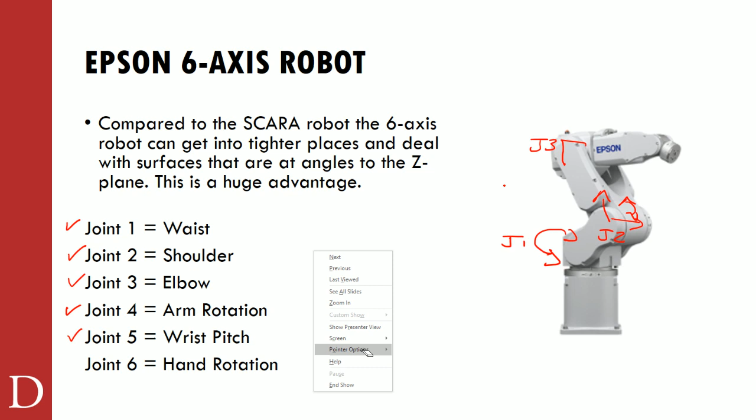So when you get to J4, J5, J6, they're all very close to that end of arm tool, right? They're all right out by the edge of the end of arm tool. What J6 does is it actually allows this thing to rotate around like this, versus this being my axis of movement for the wrist pitch, and then this is actually that faceplate's ability to rotate around and put into different positions.

So what you can see is we can definitely get into some strange, precarious places and do some cool stuff, whether it's to weld something, assemble something, handle some material, whatever that might be.

All right, before we get too detailed, I did want to go over, and this is applicable to all of robotics in general, but it comes up when we start talking about 6-axis: how does a robot know where it's at? That's really important, right? If I need to go to this location and pick up a part, then I need to know where I'm starting and how I'm going to go about getting there.

Well, each one of those axes that we were talking about is run by what we call a servo motor. So in here there's a motor, I'll call it M. And then there's a motor shaft that goes through there that actually turns this. But on the other end of that motor shaft, there's something called an encoder. So each one of those axes has a motor, an encoder, and a shaft that's actually hooked up to the gears to do the mechanical work.

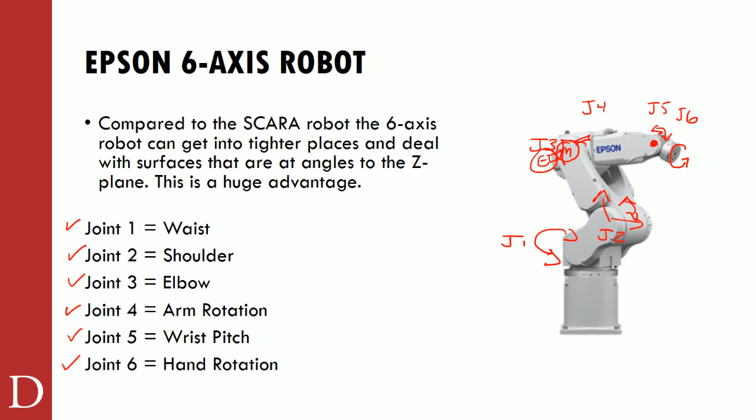Well, the beauty of that encoder is the encoder that's hooked up to that shaft has what we call an encoder disc on it. And so this is the cool part. It's essentially like having a measuring tape. Imagine I want to walk 20 feet. If I have a 20-foot measuring tape, I can do that very, very accurately, right? Versus if I just say I'm going to walk 20 feet and kind of guess where 20 feet is, right?

So that's how this does it. It basically has a measuring tape. So imagine this is the motor shaft, and down here maybe is the motor, and maybe this is connected on the other side to the actual movement that we're going to move. But as that shaft turns, it's also turning this optical disc, this rotary disc.

And it can be made of a lot of different things. It's usually going to be made of a glass, and it has shiny and opaque surfaces. The one that we're seeing right here is a little bit different setup. It's a little bit simpler. Basically, this is a metal disc, and it's got holes in this metal disc. And what we do is we have an LED right here, and that LED is going to shine a light.

And every time the light passes through one of those holes, a photocell down here is going to send a signal. So I'm going to get these little square wave signals every time the light shines through. And they're just like pulses, kind of like Morse code almost. And I just count the number of pulses, and if I get 90 degrees worth of pulses, then I know I've moved that motor shaft 90 degrees. If I get 180 degrees worth of pulses, then I know I moved that motor shaft 180 degrees.

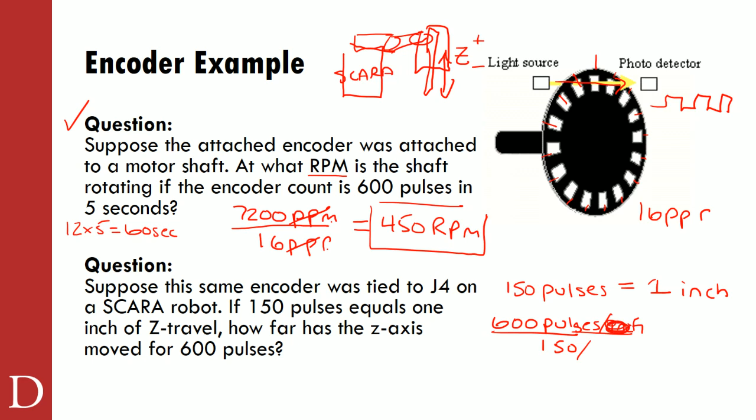Divided by, and I could do the same thing, 600 pulses per inch divided by 150 pulses. Oh, excuse me. 600 pulses divided by 150 pulses per inch. That's what I was looking for. Let me erase that, that's the messiest thing in the world. Let's get the eraser out real quick. There we go, we can clean this up a little. Go back to my pen. All right, let's type this up again.

We got 600 pulses, and we don't know how many inches, but we do know that 150 pulses per inch. I'm trying to play physicist here and keep all my units straight. 600 divided by 150 is going to give us 4. The pulses cancel out, so we get 4 inches of travel. We probably didn't need to show the math there, but it's a good idea to make sure we're making sense. We know 150 pulses is 1 inch, so 4 times the pulses would be 4 times the Z travel.

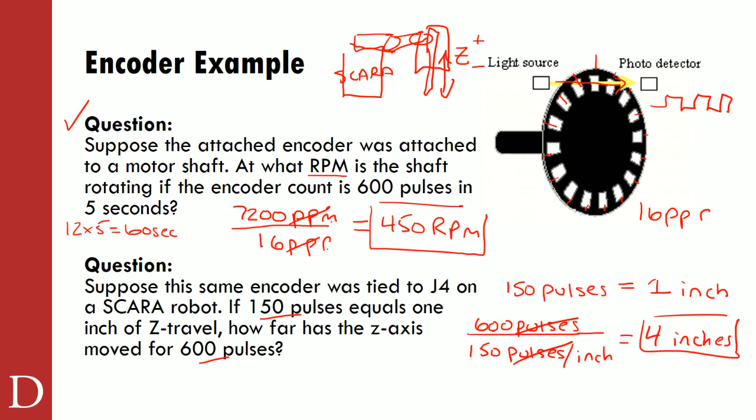All right, now here's where it's going to get interesting, and I'm going to show you some of this in a demo in just a few minutes. I should probably get my software booted up, since it takes a second to open. So let's open up our Epson software and let that start going. Epson, so that's booting up. Let that boot up in the background, and it might come into the foreground.

That's okay. So first off, before we drill into the demo, I want you to note that when we get into 6-axis motion, we're going to talk about the difference between joint and world. When you were moving the Scara robot around and positioning it, that was a little bit tricky, right? We're going to encompass the same thing now, but with 6 independent axes. If you had to move J1 a little, J2, J3, J4, J5, J6 a little, you'll discover it's painful to get that robot where you want it.

So we actually have 2 modes of operation. We have something called joint mode, where we can move each joint independently, kind of like we did in the Scara robot. I can grab joint 1 and move it around, grab joint 2 and move it around. But I can also, from the teach pendant, drive J1 in the positive and negative direction. It's trying to tell you which way those go, and they're labeled on the robot as well. I can drive J2, J3, J4, J5, J6 by just clicking these buttons. Now realize what's going to happen as you do that.

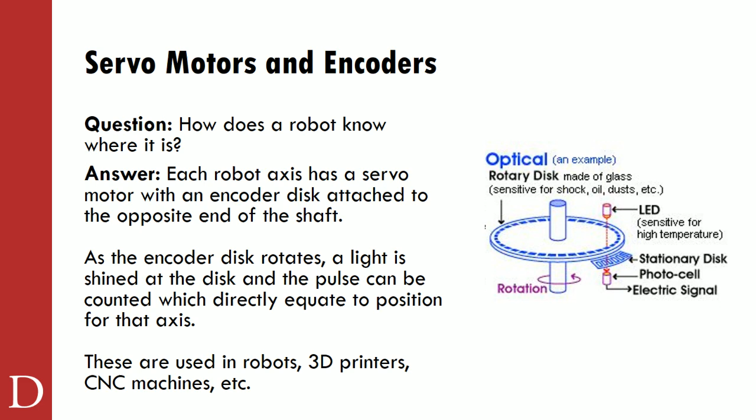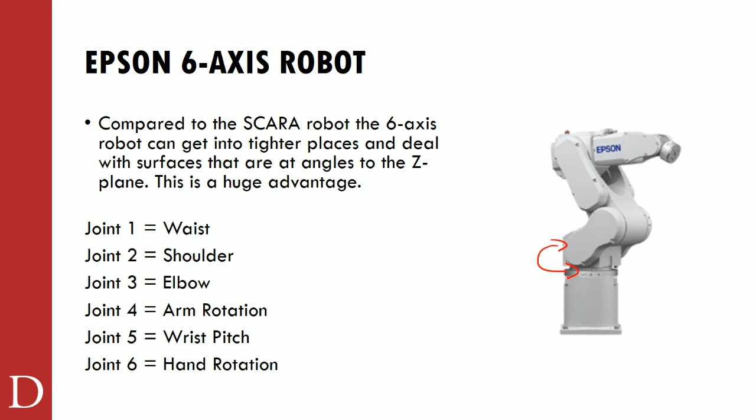If I'm moving J1, all that's going to do is just move this thing around, right? And if I'm trying to line up to something and keep my end of arm tool straight, like a move function in the Scara, it's going to be hard to do, right? Because I'm only moving one joint. We know we'd have to move multiple joints to keep that end of arm tool in a straight line or something like that. So they've developed something called world mode.

This is a really, really handy tool. And it's as simple as changing the mode here from joint to world. Now what's interesting when you do that is instead of seeing J1, J2, J3, J4, J5, J6, now you see a Cartesian coordinate system, X, Y, and Z. You also see U, V, and W.

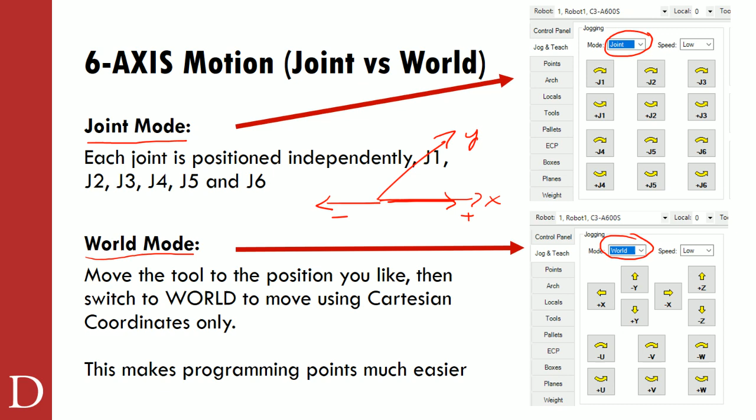But the beauty of this is now I can say, okay, well, I have X here, let's say, right? And I have Y here. I can travel along X in the positive direction or along X in the negative direction and keep everything in line with what I'm doing. This is going to make your programming so much easier. And you're not going to appreciate it by just looking at this slide. I'm going to have to show you a demo here in a minute, and I think you'll really, really appreciate this.

All right. I want to talk a little bit about a digital twin. So what we're going to build today is essentially a model of some process. So a digital twin refers to a replica, a model, a simulation, an emulation of something with a physical asset, a process, a manufacturing process. Could be a system, could be traffic patterns.

But the beauty of creating a digital model is we can simulate and make changes and commission and try different things without investing all of the infrastructure money to make that happen. So I love this slide because, I don't know, this is an oil rig, I guess. And we want to determine, is this going to work? What's this pump's capacity? What's this tank's capacity? What's this crane's capacity? We might even put some forces on this thing and see how much it can withstand. And the more data we have built into the model, the more we can test it.

So I pulled this from the most recent, oh God, what's the name of the magazine? The ISA has a magazine, InTech, I think it's called. And they actually had an article on digital twins this month. Digital twins are used to simulate manufacturing processes to ensure processes are capable prior to making large capital investments.

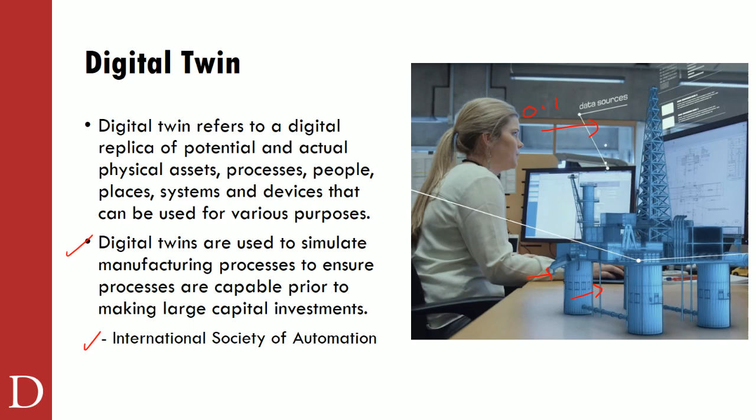All right. So, I did bring something in here. This is kind of cool. This is what they call a teach pendant. So everything you guys have done up till now with the Scara robot has really been physically moving the robot around to teach the points. But in most cases, we're going to actually move the points, X, and you'll see these are actually labeled. You can't quite see it here.

But this button says X plus and this button says X minus, but then it also says J1 and J1. So if I'm in the Cartesian coordinate system or the world system, I'm going to go off of X. And if I'm in the joint system, I'm going to go off of J1. And then I have J2, J3, and I'm going to have Y, Z, and U, V, W, and so on and so forth.

But this is in the real world. This is what we use a lot of times when we're programming the robot. I may not have to go get a computer. I can grab a teach pendant, program in a couple of points, and get it working. All right, so what we're going to do today is we're going to import a CAD model into our simulation.

We're going to put that CAD model where we think we want to put it. We'll move it, rotate it, whatever we need to do. We're going to select an end-of-arm tool, and then we're going to demonstrate programming a point from the teach pendant, and we'll probably move it around physically as well as we're doing some of this. We'll demonstrate joint mode, and we'll demonstrate world mode. So we're going to demonstrate the different modes of motion that we can use.

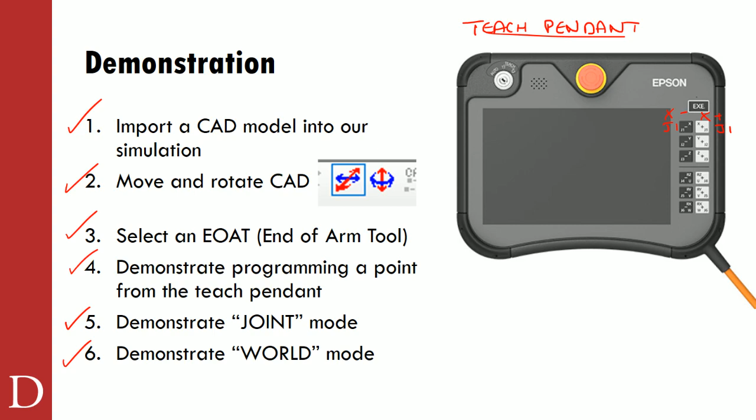So with that, I'm going to discard my ink annotations here, and I'm going to move my little pad here, get it out of the way, and then grab my mouse here, and hopefully we've got our Epson software open right now, which it looks like we do. And I'm going to bring up the simulator.

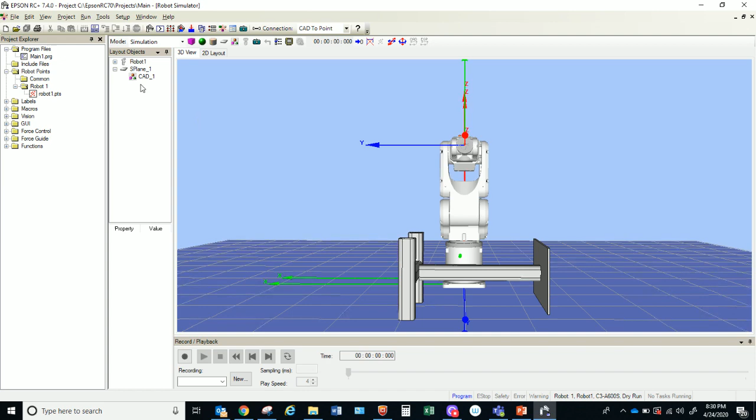I guess one thing I need to do before I do anything is get you guys to grab a 6-axis robot. I didn't have that on my list of things that we need to do. And I can see I've already got a 6-axis robot in here, and I can almost guarantee you guys don't. And I also have CAD in here that I can almost guarantee that you guys don't have as well. So if I can get rid of that CAD, I go into the 2D layout. I want to start with a blank template because this is where you guys are going to start as well.

All right. So the first thing you're going to have to do is when you click on robot, you're going to have to go to change robot. So you click here to change the robot. And when you do that, you're going to change from a Scara, which is where you guys are at right now, to a 6-axis. And I'm actually picking the C3. And then which one did I pick here? I picked the A600S, the first one on the list. So I'm just changing my robot to a C3 A600S.

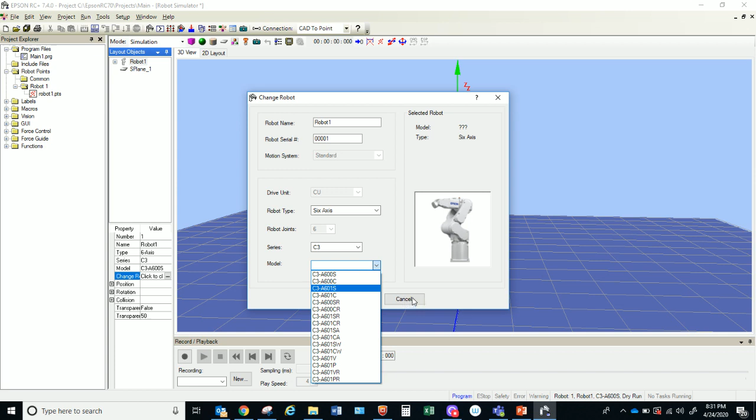I'm going to cancel out because when you do that, I will warn you, it'll ask if you want to save your Scara stuff. Sure, you can save it. And then it's going to restart the whole program. So I'm not going to do that right now because I've already got mine up and running. But it will actually restart the whole program because it's actually simulating restarting the controller altogether. So basically setting up the software for a new type of robot.

All right, when you go into Canvas this week, one of the things that you're going to notice when you go into the lab for this week is that I've got a couple of files in here. I've got the frame stand, which is a step file. It's basically just a CAD model. And I've got the G10 tool, which is also a step file, which again is just a CAD model. These two files you're going to have to download and put them on your computer somewhere.

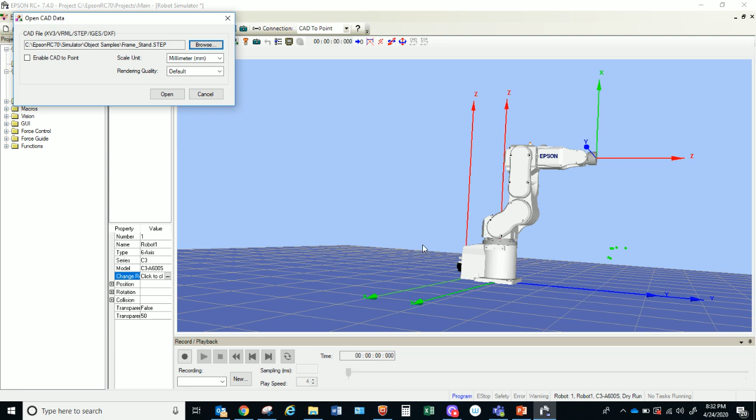The reason being is what you're going to do, first and foremost, before you do anything else, is I want you to go into CAD. So right up here where it says CAD, wherever you've saved those two files to, you're going to browse to them. And I've got a folder called Object Samples. And I'm going to grab the frame stand.step and hit open. And that's going to bring that model into your simulation.

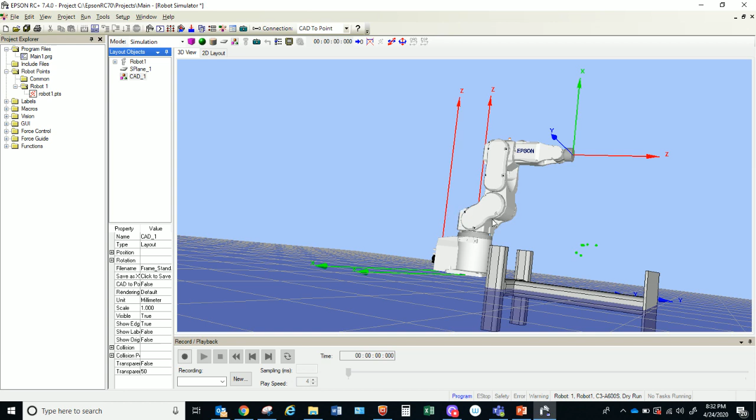So you can see it's going to think for a little bit. It's going to say, oh, there's a step file. And then it's going to also do something which I kind of hate, but it does it. It's going to bring it in based upon kind of where the Z-plane is 0. So depending on who modeled that file, it could come in like it's looking like half of it's underwater right now, which isn't the case. But what I will tell you is it's actually fairly simple to fix.

What you can do is you can move the object by clicking Move Object and then clicking on the object, and you'll see this little red line will show up, and you can bring him up. Let's try to get him up to the surface maybe. And then you can also rotate him with this one right here. So just like we're jogging the robot, we can also kind of jog the table here. This is a little bit trickier now.

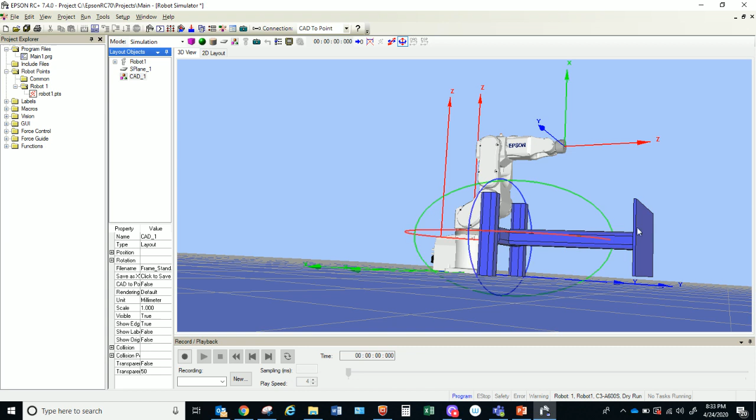Let me see here. I can stand him up. Okay, now he's really in a precarious position. He's like in midair, right? How do I fix that? Well, I go back to the move and I grab that table and I drag him back down to the surface, right?

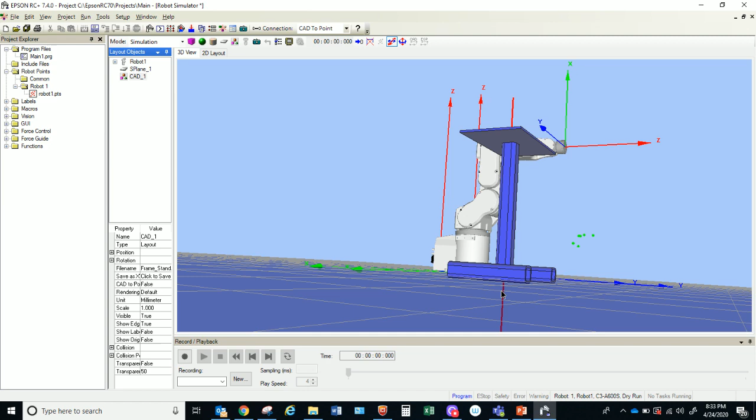And I think somewhere, and I'm not going to get real hypercritical, if you feel like you got it in the right spot, I'm going to call it good, right? It looks like he might be a little below the surface, but we're going to call him good for right now. The other thing you can do then is you can also move him maybe a little closer to the robot if you want. So I could say, okay, I want to move a little bit more.

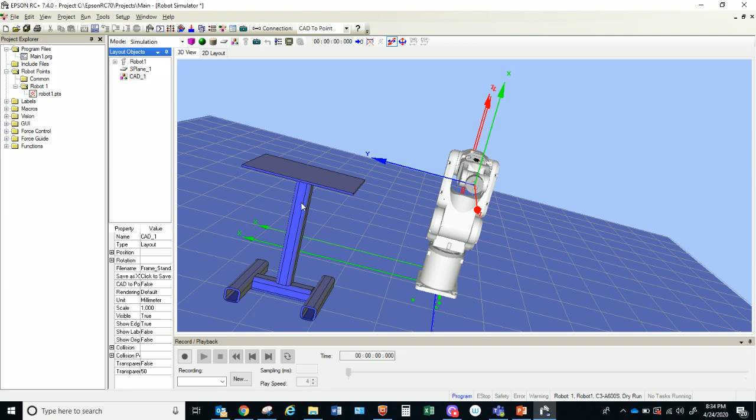I'll click on Move, and I'll click here, and I can go on this green line, kind of slide him across, and I'm just going to go like right here for now. Whatever's most convenient, we'll call that good. He might be a little close to the robot. Let's maybe move him a little bit out too. So I'll click here and I'll go out a little bit as well. Close enough. I'm going to just call it good.

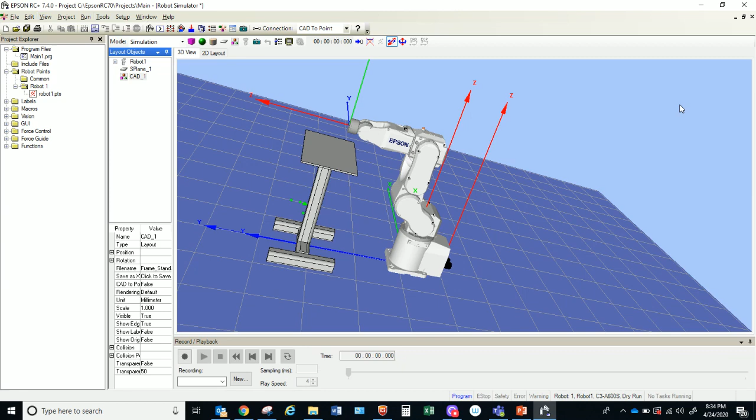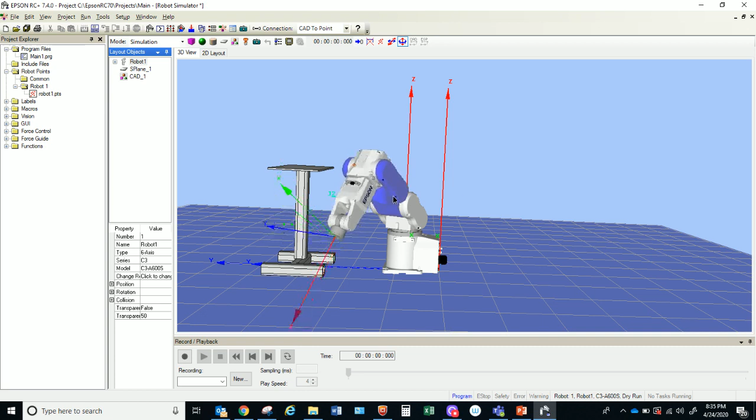You're going to have to figure out what that position is and where we're going to put that guy to work on him. All right. But I think we've got a pretty good start there. Now we can also do that with the robot, right? I can click here on object orientation, and I can actually grab an axis on the robot and I can twist it around, right? And I can also drive this guy down and do all that stuff. So just like we did with the SCARA, but now we have 6 axes of rotation, so we've got a lot of movement that we're capable of, right?

All right, so we've got our CAD model in there. We're feeling pretty good about that guy. The next thing I want to do is I want to add an end of arm tool. So the other thing that you'll see in Canvas this week is you'll see the G10 tool. It's just a tool. What we're going to do this week is we're going to simulate welding this table up. So we'll pretend maybe it's tacked up, maybe it's fitted up, maybe it's fixtured up. We're not going to get crazy on the model itself, but we are going to pretend we're putting some welds, right?

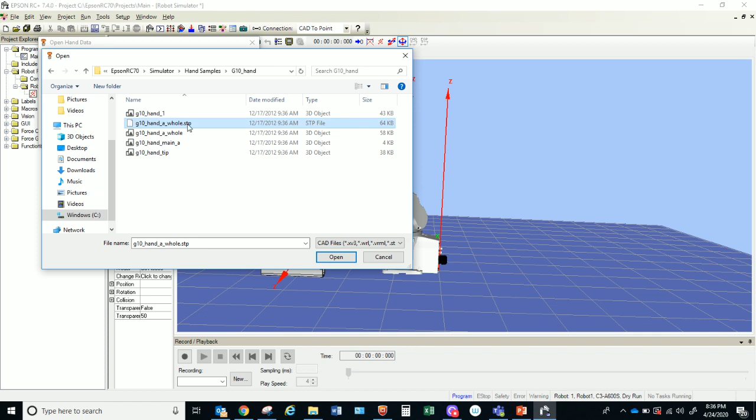So what I'm going to do now is I need something that looks like a welding torch. So I'm going to go into the robot right here, and then I'm going to go up here, and I have my CAD model that I brought in, but I also have a hand. I'm going to go into hand, and I saved that G10 in a folder called hand samples, G10, and it should just be called G10 tool.step. Mine's saved a little differently. I made yours a little simpler though. So it'll be G10 tool.step.

And now when this comes in, you're going to see it comes in like a little, I don't know, what do we call it? We'll call it a welding torch. But I'm not a real big fan because it's coming in at kind of a 90-degree angle, isn't it? I wonder if I can rotate it? Maybe. Let's do this. I don't know if I can rotate it. I do know another way to rotate it though, so let's not worry about that.

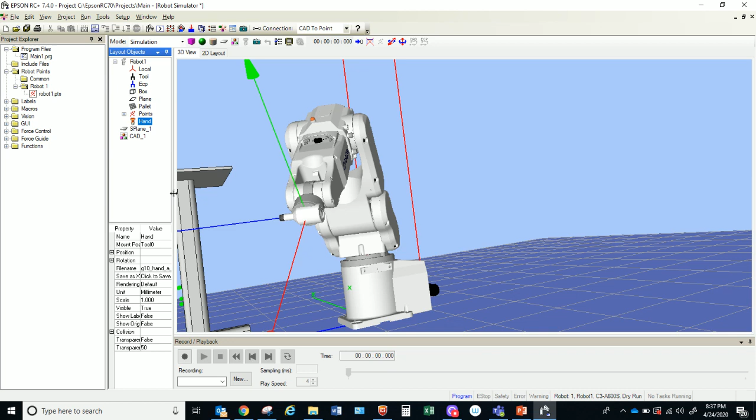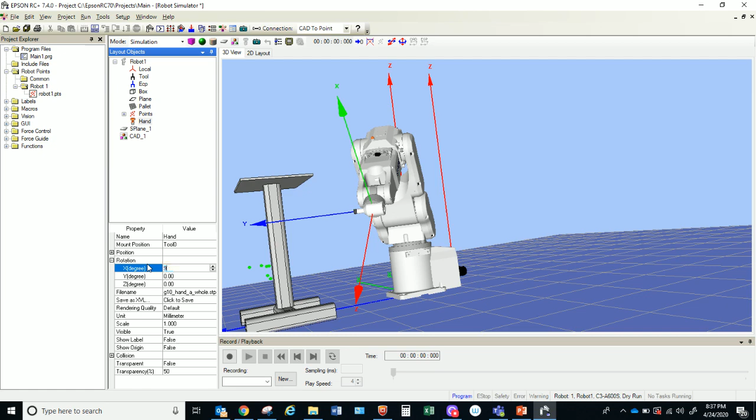Another way to rotate it is if you actually go into the hand right here in the layout objects, you've got a hand now. Now if you scroll down a little bit, you can actually do a rotation in here. And just got to look at which axis you're looking at, right? So where do I want to rotate? Well, I want to rotate out, like it's a welding torch sticking straight out on Z here. So I feel like I got to rotate about the x-axis. So let's try 90 degrees in X. Oh, that's perfect. So now what you can see is it's almost like I got a little welding torch on the end of there.

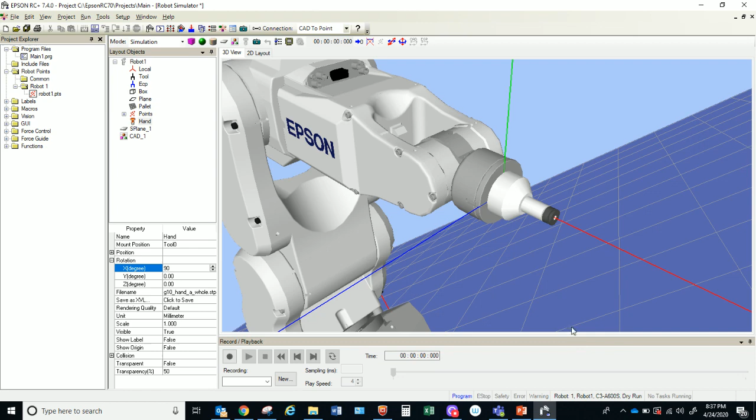It's not a welding torch. I don't even know what tool this is. It looks like it's a little suction cup or a touch probe or something. But what we're going to call this is a welding torch. We'll pretend that that's an electrode coming out of a MIG torch, whatever it might be. We're just going to pretend for today's sake.

So now we've got something that we think we can weld with. We're like, okay, I can weld with this. This is going to work for me. And here's where it gets funky again. What I'm going to have you guys do is a bunch of welds. You're going to weld the bottom of the table here to the top of this pole.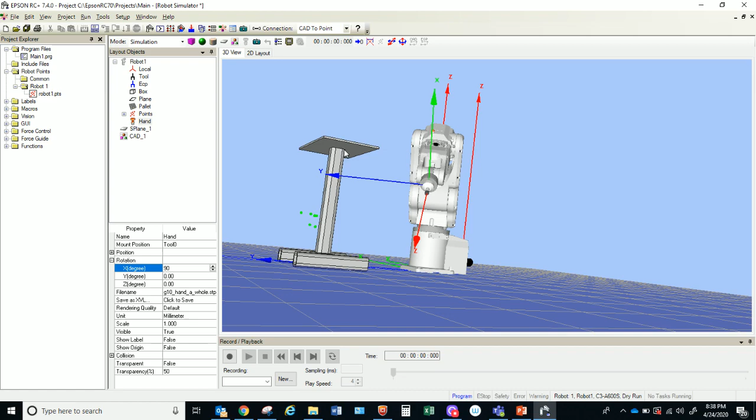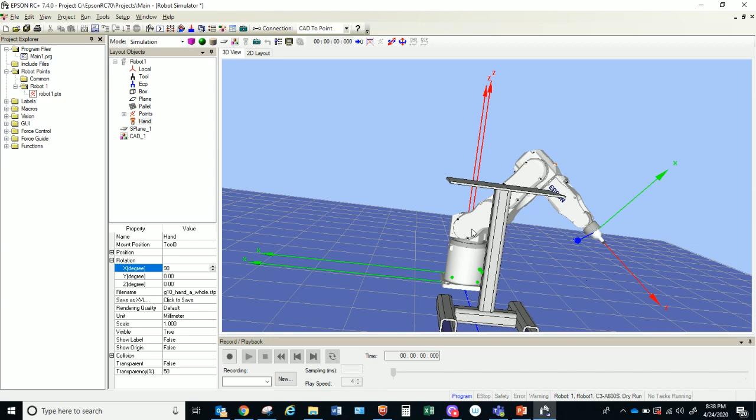You're going to weld the pole, and it always screws me up trying to get this right where I want, down to this base piece here. And then I'm going to put a weld here and a weld here. So that's what you're going to have to do for today's lab. But for right now, we're going to make it a little simpler, and just go do something with this so you guys get an idea how this works.

And you may decide that, boy, I really need to move this table out, right? I'm going to click on the table and move him out a little bit because he's too darn close to where I want to be. And I'm fine with that.

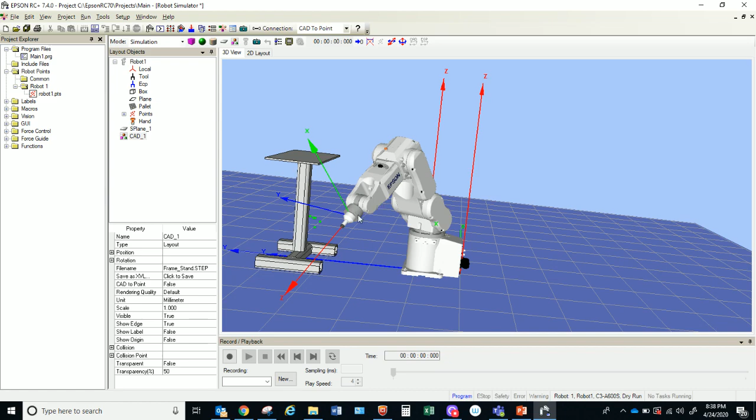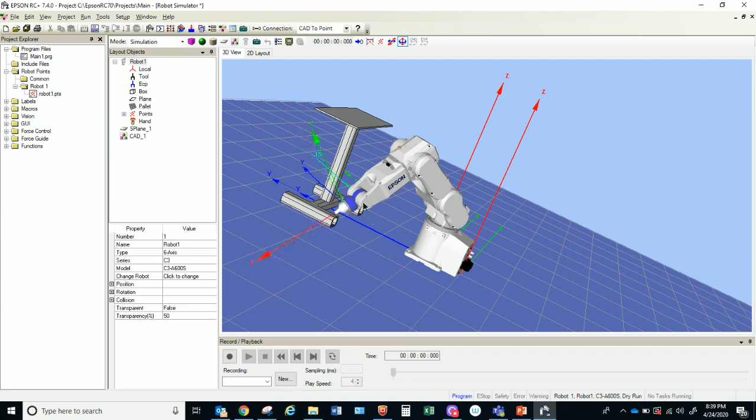All right, so now we're going to go ahead and jog this robot to a location that I think is close. I don't want to do the exact lab because I want you guys to do the lab, right? So I'm going to bring my robot down a little bit, bring this back out a little bit, and drag this down a little bit as well. And maybe we can get close now. Feeling pretty good.

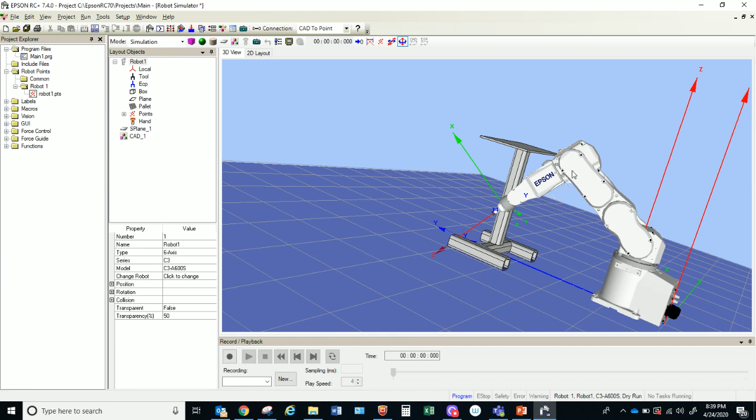Maybe I'll just cut along this edge here or something like that. I don't know if my arm's going to fit under there. I think he will. So I'll go down a little bit more. Maybe I can get out a little bit even, huh? Get on this edge here. Oh, I kind of like that. That's pretty good. Bring it down.

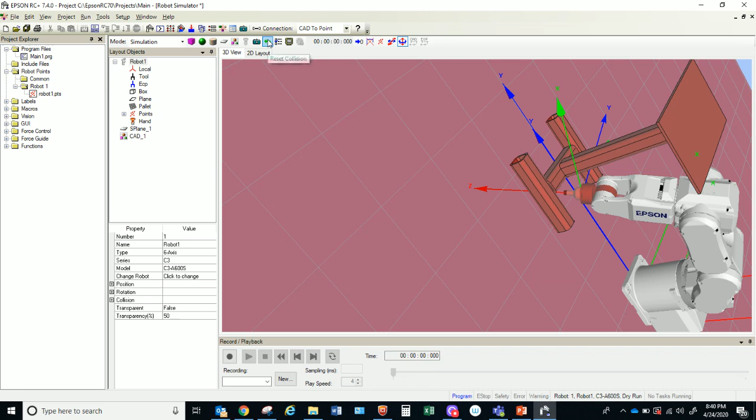Oop. And if we crash, that's okay, right? We can crash. There's no problems there. We just got to reset the crash with this little reset collision. And can I come down? Sure. I feel like I want to rotate over a little bit, try to get where I want to get.

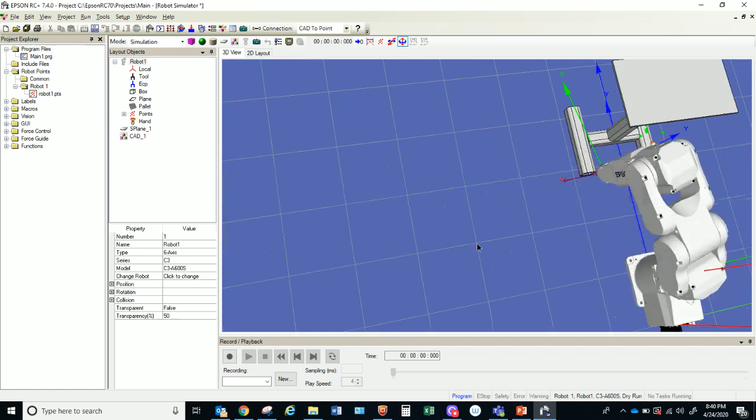All right. Now what you'll notice is what we've been operating in right now is what I would call the joint mode, right? Actually, I'll go right here. Some of you folks that are really good at CAD are going to be a lot better at this than I am. But let's just go there for now and call it good. I'll reset my collision there.

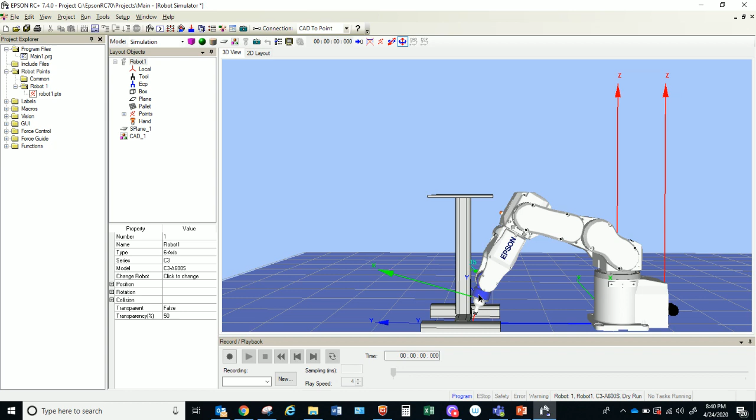All right, let's say that I want to just draw a line along this edge, right? If that's all I want to do is just draw a line along this edge right here. Boom, boom, boom. Go in that direction. So I'm going to start here and kind of go along this edge. Now, that's going to be painful to program that point in there, right?

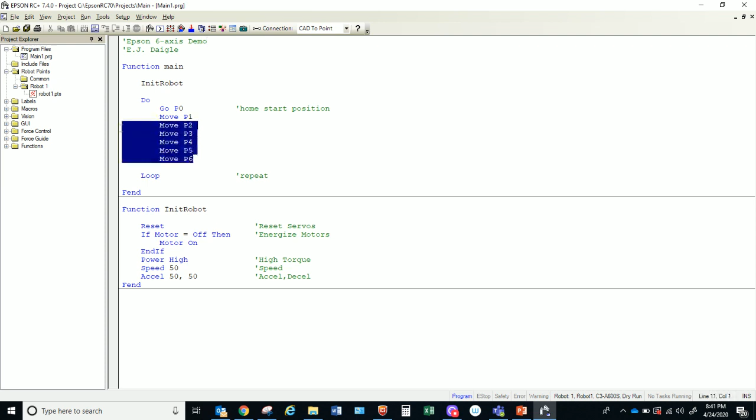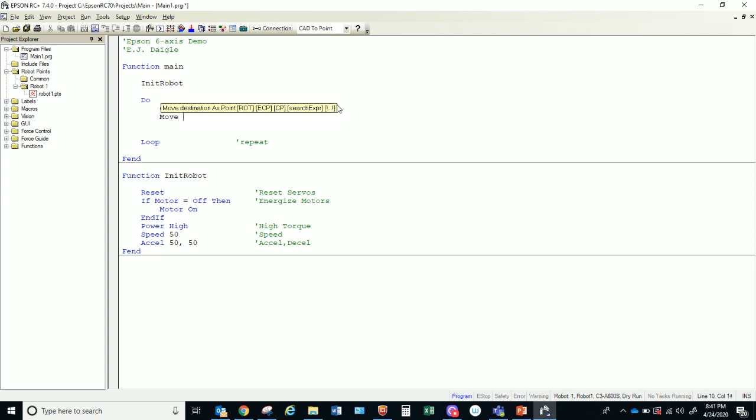I still have code left from my previous stuff. This is a 6-axis demo. But let's say I just want to go between 2 points. So I'll go to point 0, and then from that point, I want to move to point 1. So I'm actually using the exact same code as with my previous examples. But how I'm getting the points is going to be a little bit different.

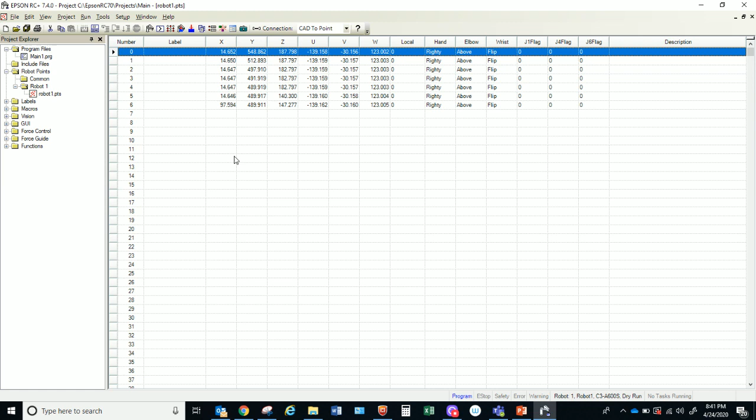And then points, do I have some? I got some. I'm going to delete them all out for now. It's just an old program. And then I'll go back to my simulation.

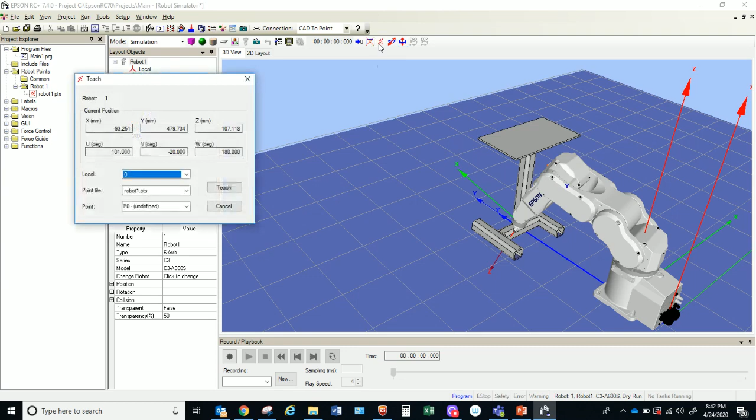And if I want to call this point 0, I could do that. I could go ahead and say, you know what? We're going to call this point 0. So teach a point, point 0, local, done.

Now, what we maybe have done in the past is we would zoom in and try to go all the way across there. Here's where I'm going to change it up a little bit for you. What I want you guys to do is go to Tools and go to Robot Manager. And when you go into your Robot Manager, there's a couple of things that are important here. If you ever get an error, not a crash error, but like an acceleration error or something like that, you can always reset that error here and you can turn your motors on here, okay? If you ever get an error, you reset here, you turn your motors on.

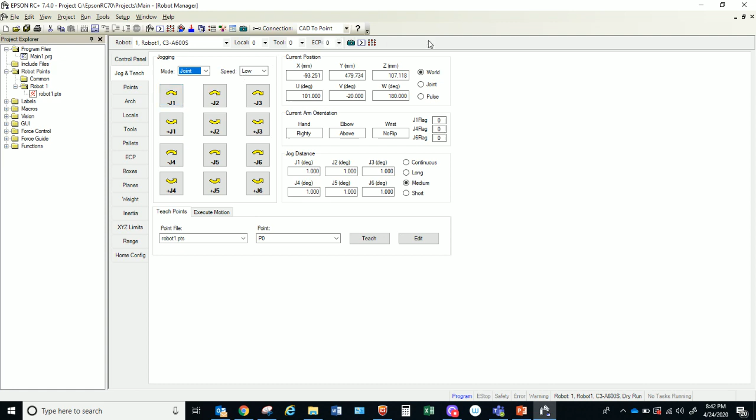But the real reason why we're coming in here is I want to go to Jog and Teach. You'll see I can be in joint mode, and if I'm in joint mode, I can move those individual joints little by little by little, right? And I can actually pull this up to the side, and I could watch what's going to happen over here, couldn't I? I can make this pull this way a little bit. I don't need that much of that menu. I want more of this menu. And we'll pull them over a little bit so we can see them.

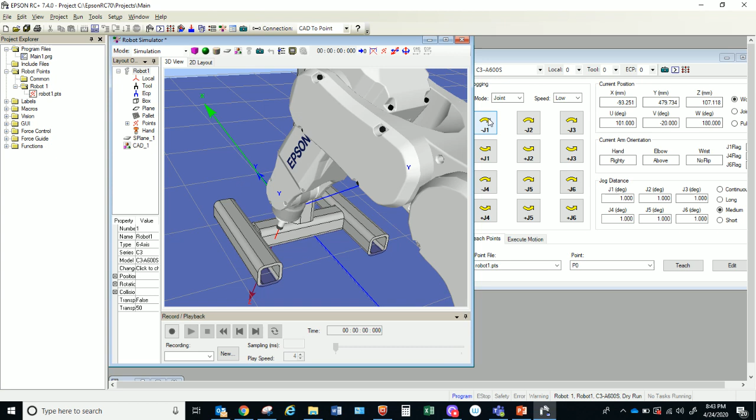So let's say I want to move J1 a little bit. You can see how J1 moves just a little bit, right? But I'm only moving J1. And here I'm only moving J2, which might be handy, right? I can get a lot finer control by moving the joints like this. I'll move J1 maybe back a little bit this way. But where it comes in really handy is once I have that first point, let me reteach that point again. So I'm going to call this P0 again. I'm going to teach it. Yep, reteach.

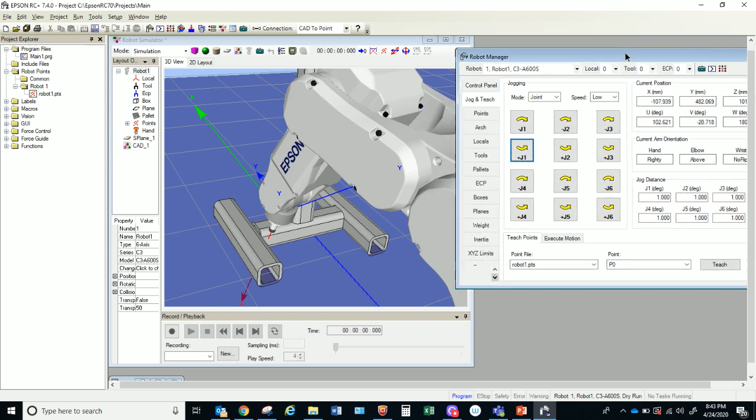But now I'm going to change it up a little bit. Instead of running in joint mode, I'm going to run in world mode. You might say, well, why do I want to run in world mode? Well, the reason why is because this thing is essentially on the Cartesian coordinate system, right? I've got X, Y, and Z here. So if I move in Y, look what it does. It kind of runs along this axis, doesn't it? All right. But I should probably reteach that point now that I've taken myself out of the Y. So I'm going to reteach point 0 again because I just changed my Y.

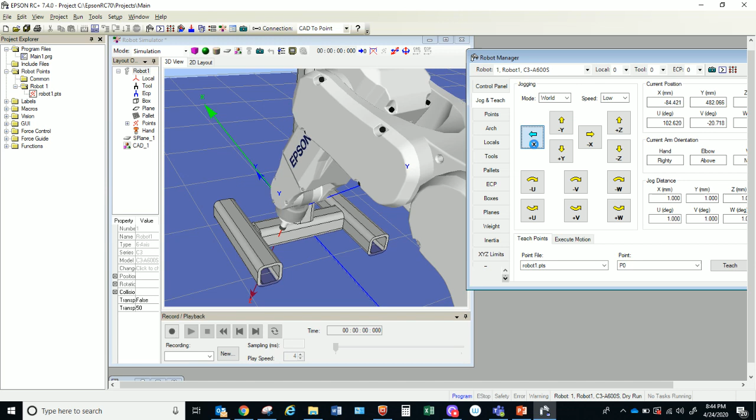So that was my Y. If I want to move my X now, I can move in my X this way, and I'm just going to slide all the way across this thing, boom, boom, boom, until I'm pretty happy as to where I'm at. So if I was triggering a weld, let's say, I could go all the way across here and just keep going and going. And I can change my speed if I'm going kind of slow, right? That doesn't affect how fast I go here, of course.

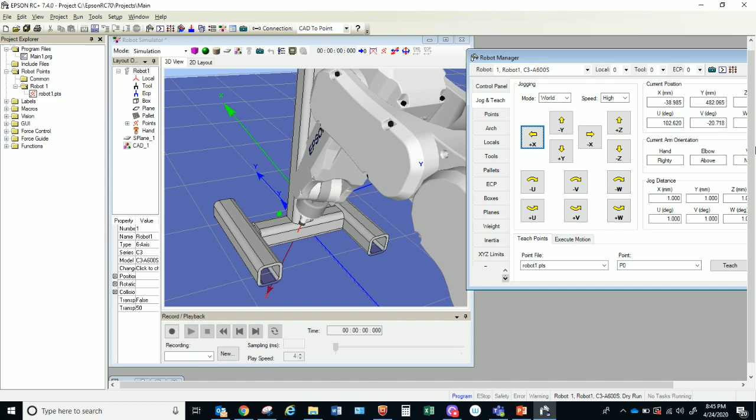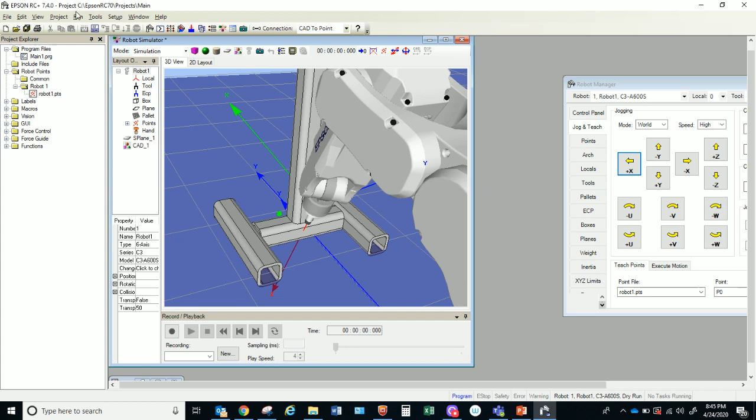And what you'll notice, there are other things changing as I do this, right? My Y is staying the same, but as I move this X plus, you see my Z may change a little bit. Some of the U and V are changing a little bit too. And so now when I go to teach that next point, I can hit teach for P1. And now when I go to run this, I go to the run window, and I go to start, ready to start.

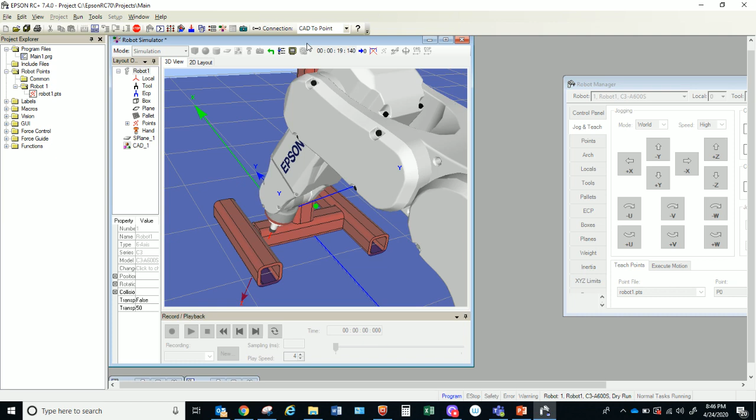Oop, let's get out of there. There we go. Ooh, I just crashed it. And I might say, well, why did I crash it? Well, I can tell you almost for sure why I crashed it. It was fine going the one direction. Oh, I'm surprised it didn't crash again. I'm pretty sure what we're seeing happen there is, zoom out a little bit.

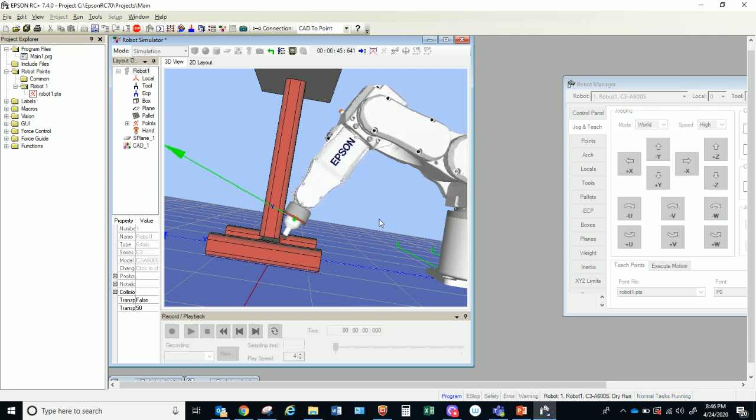Thinking the top of my robot there is just a little bit too tight. So let's hit the, yeah, this piece right here is just a little bit too tight to the robot there. So I would have to maybe, I could even reteach these, right? I could say, you know what? Those points are garbage. Let me get out of there.

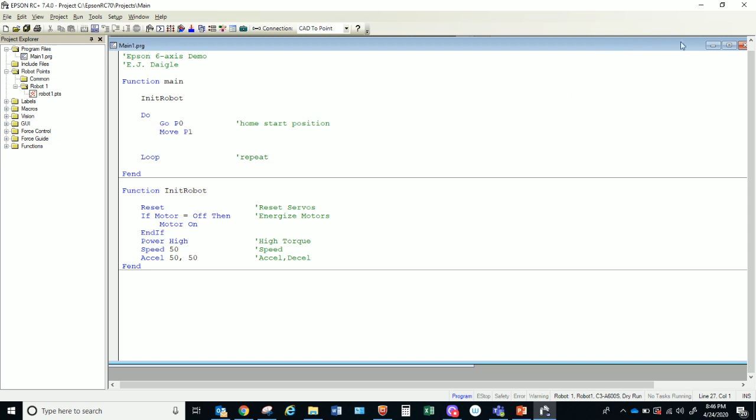It's my robot manager. Those points are junk. I'm going to delete those out. And I want to get back in there a little bit differently now. So I'm going to go back into my, let's see here. I don't need that, but I do need this, I think. Nope. Well, I can find it by going again to Tools, Robot Manager.

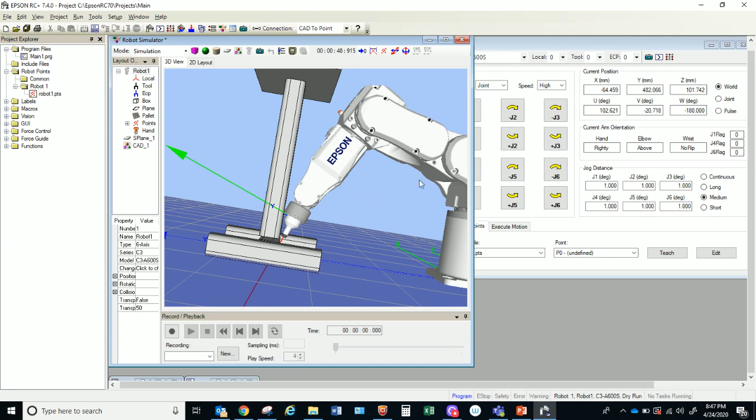And, oh, there we go. I'm on it. It's the same with my points. I'm going to go to Jog and Teach. I'm going to go back into my Joint tool. And what I'm going to do to try to fix this is I'm going to, let's see, reset the fault. And we got to think J1, J2, is it J2 that we can pull in? Maybe a little bit.

J3 could come this way maybe a little bit. J4 I don't care about as much. But J5 I think I could angle. You can see how J5 is moving right now. You can kind of see how I get nice and accurate. Now if that's moving too slow, of course I can always come over here and hit this, right? And grab J5 and move it in.

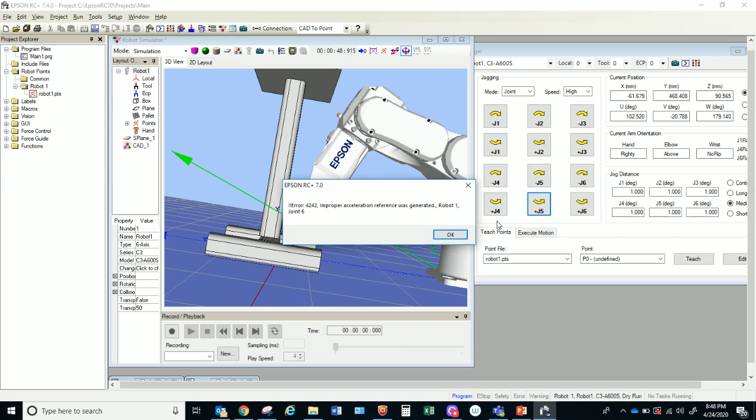Now, oh, I love this error. Okay, this is an error that's very, very important. If you get an acceleration error like this, this is where you need to go back into your controller and go into the control panel, and the motors are off, so you need to reset everything and go motor on.

What can happen is if you start moving one thing a little too fast, and sometimes the joints are a little bit out of sync with each other, you may not always get the result that you want, and it'll give you an error. So I'm going to go back to just doing it kind of slow with J5 here and kind of get that to where the point of the tool is further out. Yeah, about like that. So now I'm not going to crash anymore. I feel a little bit better about that.

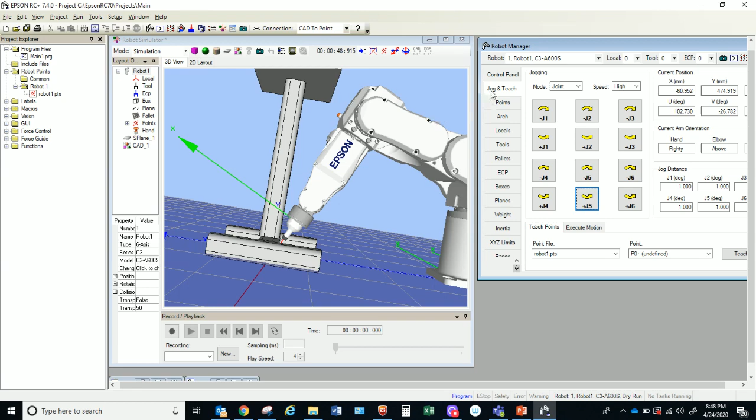And now I'll go ahead and I'll program that first point. I maybe will move around a little bit so I can see where I'm at. And I don't know, I could move J1, but I'm just going to do it real quick here just so you guys get the idea. So I'll program in a point for P0 again. Yep. And then I'm going to go to world. Okay, joint is how I got to where I think I needed to be.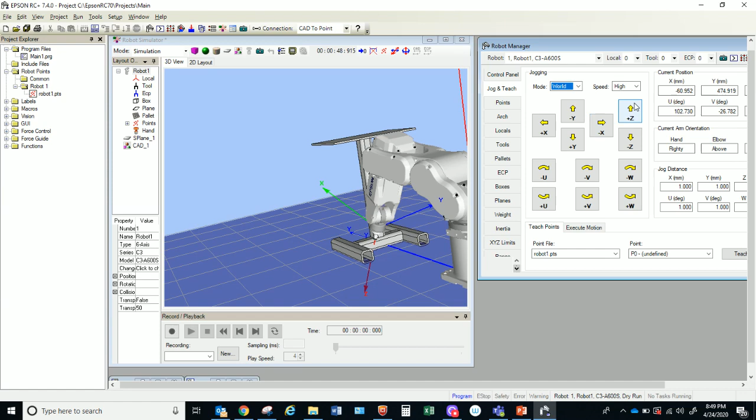Now remember, where are we going? We're not going on Y, we're going on X, right? And we're going X positive. So I'm going to go this way. I kind of want to see how it's working. So I'm going to come in a little bit and down a little bit. All right. I'm going to go in the right direction. That's the question you always got to ask yourself, right? So you can see I'm definitely going the right direction now.

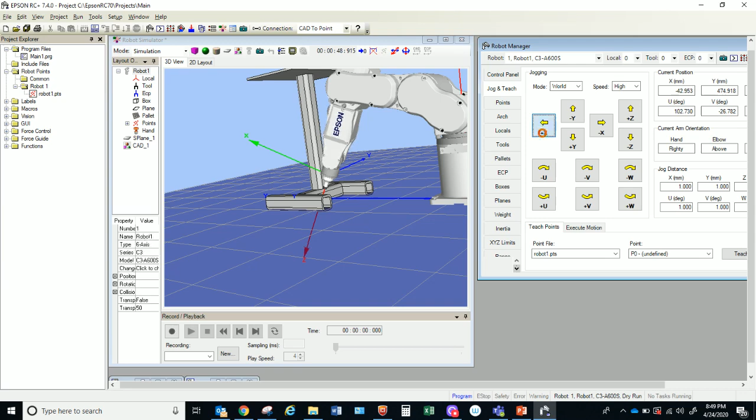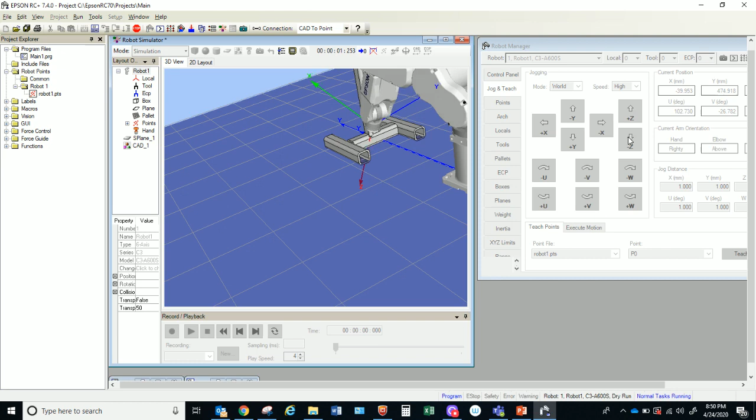Now I may at this point decide to do another point just to see what happens. Teach that point in there. I'll go to my run window. Hit start. Ready to start. We'll see what happens. This one's kind of funky. Kept my tool in that same orientation. It's just kind of rotating J3.

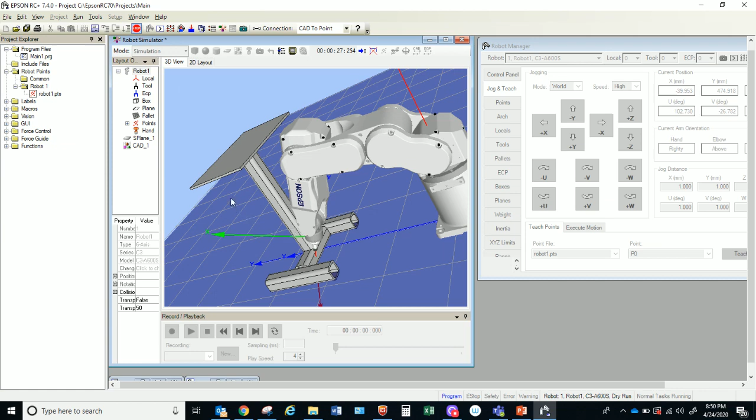But what you can notice here is you can see that it's actually maintaining a nice straight line there. So the move instruction combined with the movement that I'm making right there is keeping that thing in a nice straight line as it's going forward. All right, so hopefully that kind of makes sense for what we're doing. You know, as you look at this table, I want to show you guys the lab first probably, just to give you guys an idea of what's going on here. 6-axis lab.

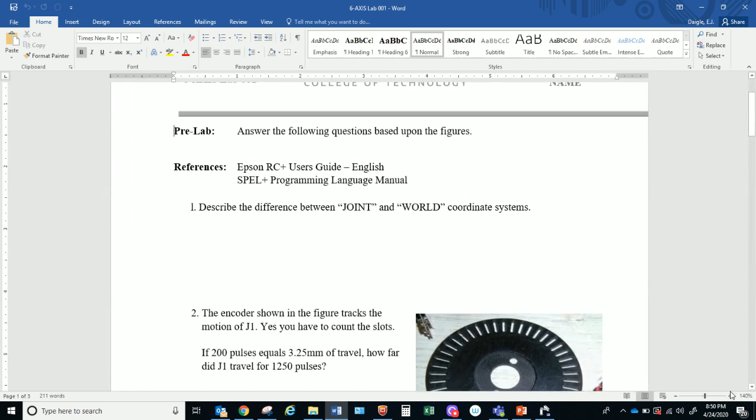All right, so on the lab for this week, describe the difference between joint and world. That should be pretty easy. Individual joint movement versus moving along Cartesian coordinates, X's, Y's, and Z's.

All right. The encoder shown below, if 200 pulses equals 3.25 millimeters of travel, how far did J1 travel for 1,250 pulses? Yeah, people hate this question when I ask it because, yes, you have to count the slots. So this is a little LED with an emitter and a receiver. And this wheel would spin around with this emitter receiver kind of sandwiching it to be able to read the slots as they come by.

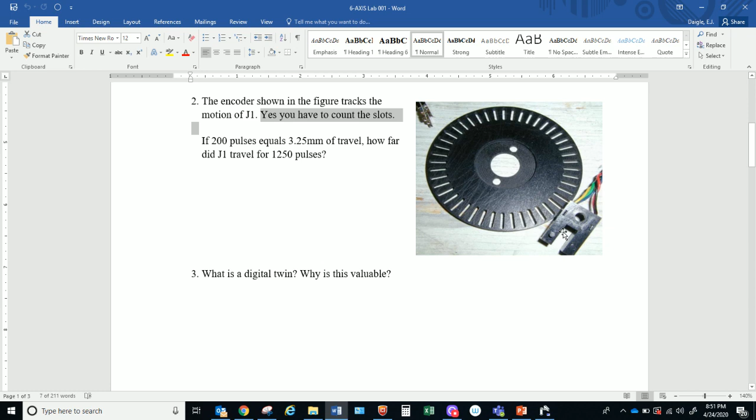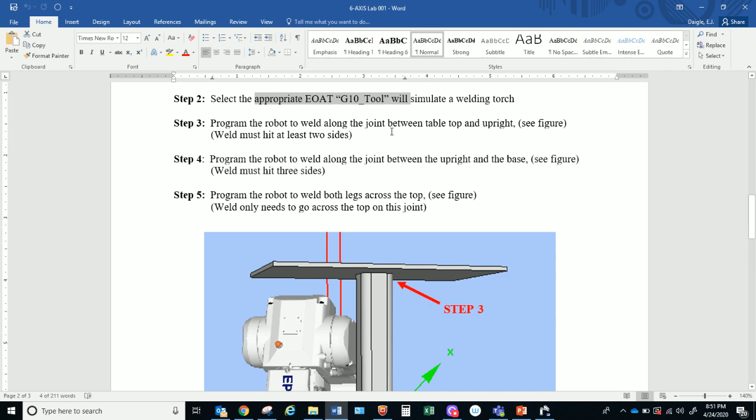What is a digital twin? We talked about that. Why is it valuable? And then this is where it gets tricky. All right, so what you're going to do is import that frame stand into your simulation, which we just did. So I think step 1 is probably done if you've been following along. Step 2 is we're going to select the appropriate end of arm tool, G10 tool. That's going to simulate a welding torch.

Step 3, we're going to program the robot to weld along the joint between the tabletop and upright. That's up here. Between the tabletop and upright. And I want you to hit at least 2 sides. If somebody can get it to do all around, that's incredible. I don't think anybody's going to, but I would hit this side and this side.

So you basically go in there with your torch and you draw a line there and you draw a line there. The goal is to keep that torch at an angle coming into that joint and just pull it across there. It doesn't have to touch the joint. Get it close and get it to go along that seam is all we're looking for.

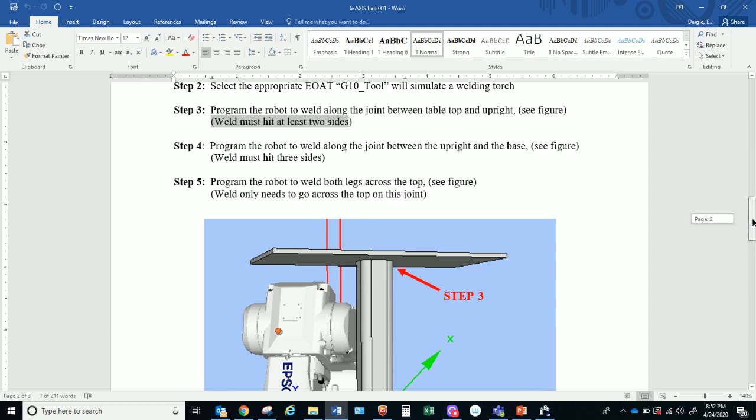Then we're going to program the robot to weld the joint between the upright and the base. So that's going to be step 4, and you can see where step 4 is pointing. So between the upright and the base, this is the upright, this is the base piece, right? And so what you need to do there is you must hit 3 sides.

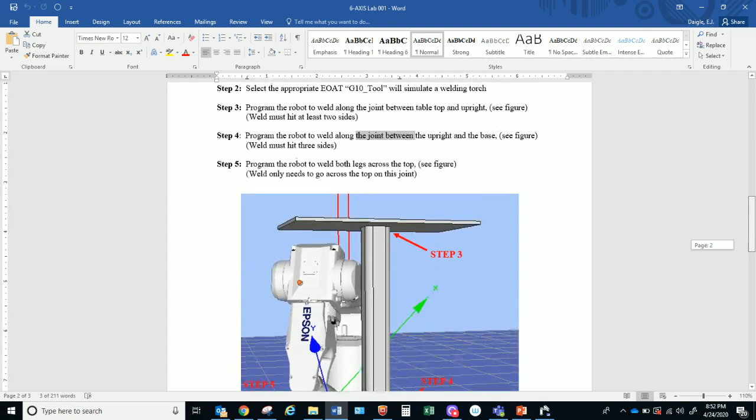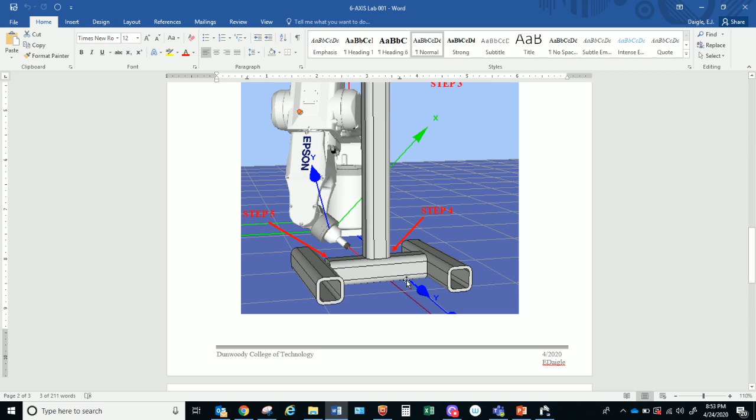So my recommendation there, you can see I was actually doing this job earlier, is I do this side, I do the front that's closest to the robot, and then I do that side. And you should be able to get all around there, the 3 sides. I don't think you'll be able to get back here. I've tried, and it's possible depending on how your shape is oriented, but it's very, very difficult.

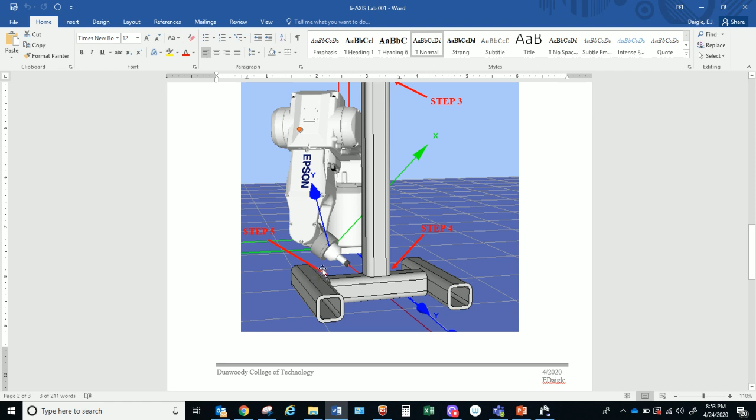All right, then step 5, program the robot to weld both legs across the top. Weld only needs to go across the top on this joint. So in this particular case, it's going to go across here, and across here, just connecting these stabilizers to this cross beam. So a little joint here, a little joint there, and then you're basically done. Is this hard? Yeah, this is hard, especially hard in a simulated environment than it would be if we were doing this really in the lab.

So then you'll comment your code, ensure the code meets the steps above. Save the following files and email them to your instructor. So a Word file, a Notepad file, an Excel file is what I want. So your point data will come in the Excel file, the Notepad file with your program code, and then your Word file.

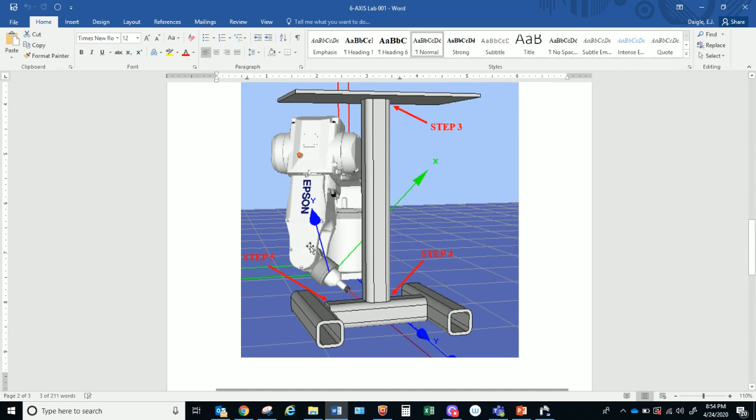And I will ask you to do one thing for me, and that is to orient the workpiece similar to what I have done. Meaning I want the legs to be kind of facing the robot, and the upright and the table across like this. And you might say, well, why is that important? The only reason that's important is because when you send me that group of robot points, I don't necessarily get exactly where your table is positioned.

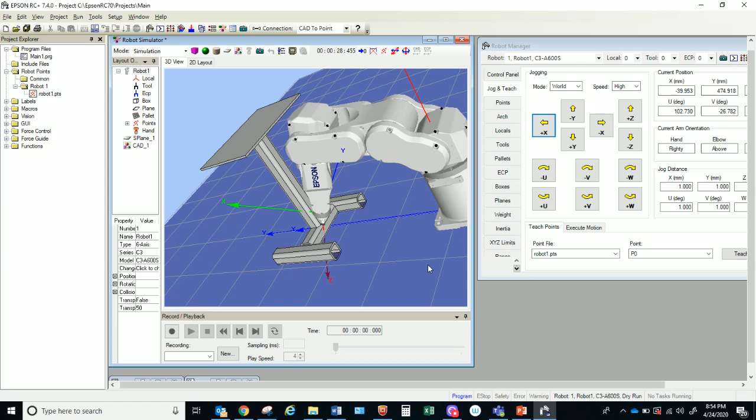But once I see you make that first seam, I can very easily orient my table to where that first seam is, and then everything else will be in place. So that's how I go about grading it, to make sure that you are actually putting the seams where they belong, and so on and so forth.

So with that, that will conclude this lesson on Epson 6-axis robots. I hope that makes sense for you, and I hope that you guys reach out to me with any questions or concerns that you may have when working with the 6-axis robot.